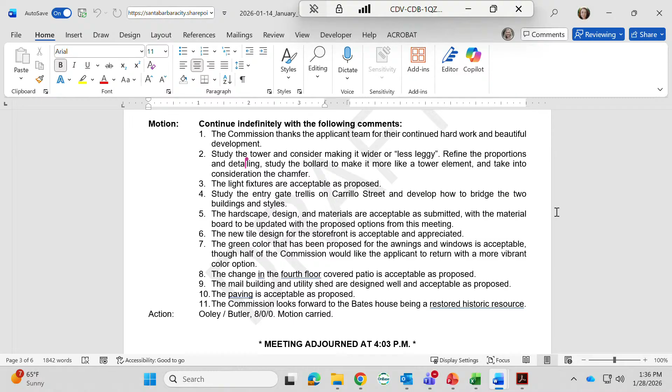Number 2, less leggy isn't clear. Well, we use the word bollard, but I don't think bollard is the right word architecturally speaking. A bollard is a thing that stops, but these were more abutments or buttresses or something. I think what we're referring to is the tire wheel stops at garages in the 1920s, and I think that was the bollard reference we were trying to describe. They were using that as a design element in a tower, and it felt weird that they were using that bollard-like element in a tower, which sort of didn't belong.

I think it was very clear to them what we were talking about, and if you listen to the video, it'll be very clear. I just thought for Historic Landmarks Commission we should use the correct terminology architecturally speaking, but I don't know exactly what it is. I thought one of you might know. Let's leave it as is, I can't think of it, there may be another term for specifically that element, but at least for them it was clear enough, they knew what we were talking about. Unless we think of something better for it. I did a little look and couldn't find the exact thing.

Okay, and then finally on number 11, just very minor, we were also looking forward to the colors of the Bates House in the next round. Number 11, the Bates House being a restored resource and the colors. They didn't have the colors yet, but they were going to bring them next time.

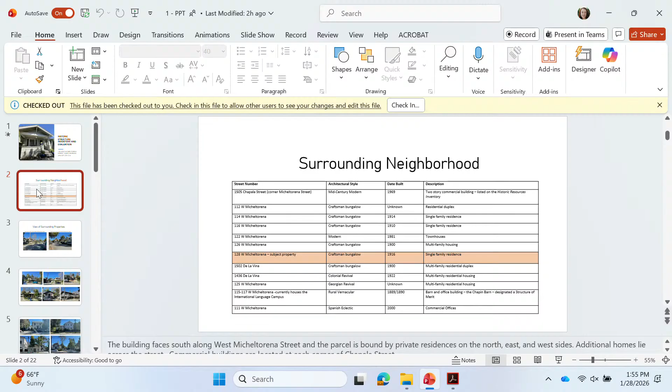The building faces south along West Micheltorena Street, and the parcel is bound by private residences on the north, east, and west sides. Additional homes lie across the street. Commercial buildings are located at each corner of Chapala Street.

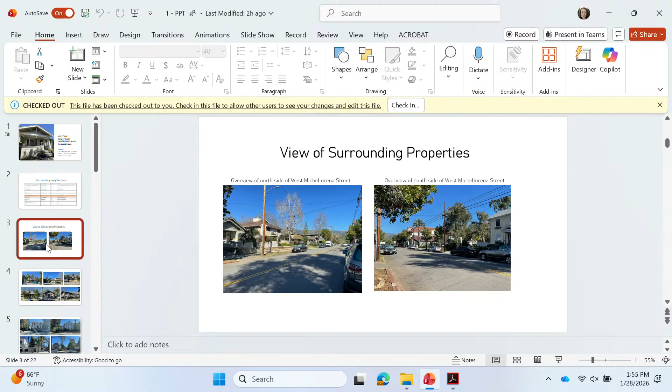This is a view of surrounding properties along Micheltorena Street. Here's a view of buildings on the north side of the block, starting with 1502 De La Vina Street, a large multi-residential building. It does have craftsman details, such as the knee braces.

Then we have 126 and 122 West Micheltorena, another bungalow and a multi-residential unit to the east of it. Then we have 116 West Micheltorena Street.

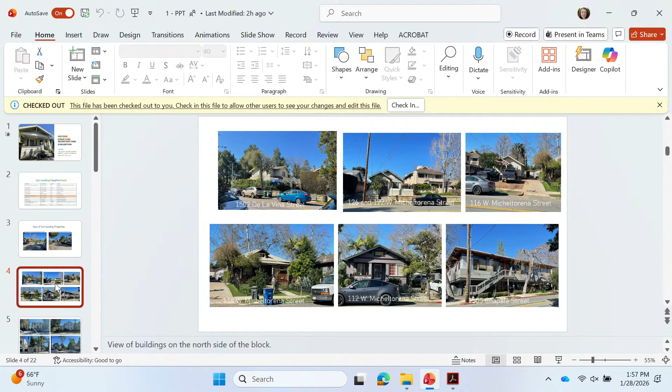Which is a very modest residence. Then 114 Micheltorena Street, that's a vernacular building. Then 112 West Micheltorena Street, that's modified. It does have craftsman knee braces along the roof line, but nothing more than that. Then 1505 Chapala Street is a commercial building.

Here's a view of the buildings on the south side of the block, including a colonial revival and a Georgian revival residence at 125 West Micheltorena Street and 1436 De La Vina Street. Then we have the Chapin Barn and office building. The office building has been restored. And then there's a Spanish-style revival building at the corner.

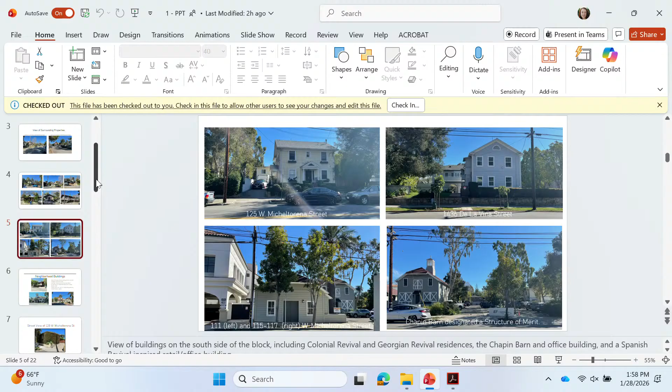The Danica House office building, built in 1969 at 1505 Chapala Street, is indicated on your left. Then the Spanish-influenced commercial building at 111 West Micheltorena is below on the left. And then we have the Chapin Barn and office building. The Chapin Barn, although it's been renovated, is listed as a structure of merit.

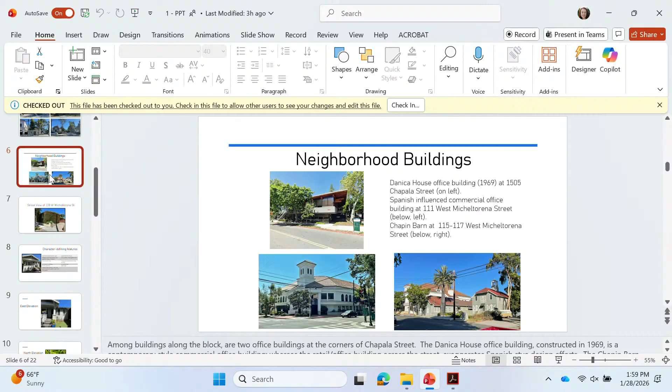Here's a street view of 128 West Micheltorena. A tall hedge frames the front of the residence, mostly obscuring it from the street. Behind the hedge is a small grassy lawn with landscaping next to the house. The hedge offers protection for the occupants' children. Edging the sidewalk below is a hand-chiseled sandstone wall.

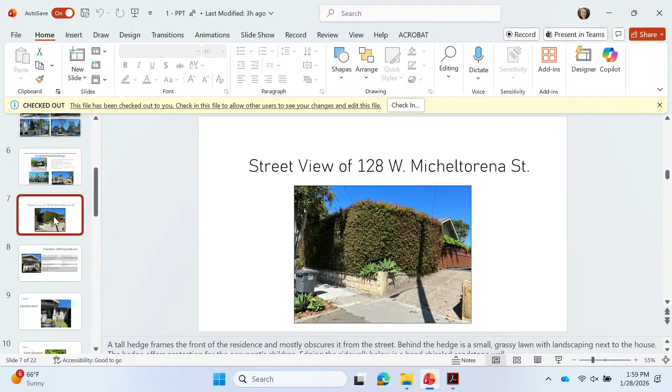The subject property is a craftsman-style residence, generally characterized by its wide eave overhang, triangular knee braces, and partial width front porch with corner columns. The one-story residence exhibits a raised floor foundation, wood shingle siding on the exterior walls, which are replacements, with wood skirting below, not original, and a low-pitched front gabled roof clad with composition shingles that are not original. This house form was prevalent in the early 20th century, especially in Southern California, between 1905 and the early 1920s.

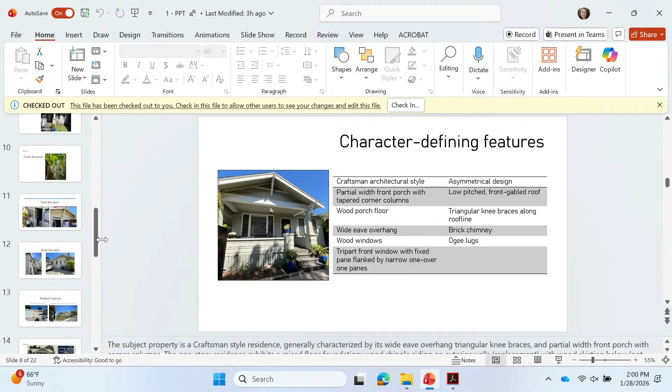I'm so sorry, I'm going to sneak in here. City TV has asked that it be full screen so it's more visible to the public, sorry. But you can move through the slides with this button right here. Okay.

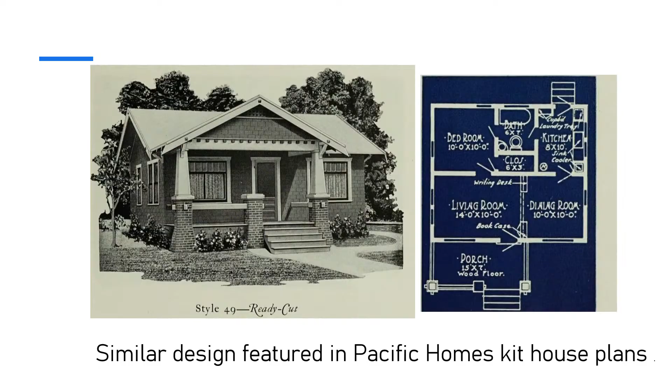Building modifications. There weren't a lot that were indicated over time, but the property records database contains permits, with the earliest permit for the subject property in 1944, and the most recent permit filed in 2004.

The most substantial known alterations occurred in 1944, when the property owners likely put a wood door on the new cellar, and skirting was placed along the base of the house. Other modifications at that time include a rear porch, toilet, bath, and window, which may be when the footprint was extended on the west and south elevations.

Mr. Peugeot replaced some of the doors and windows in 1984, and installed replacement roofing in 1993.

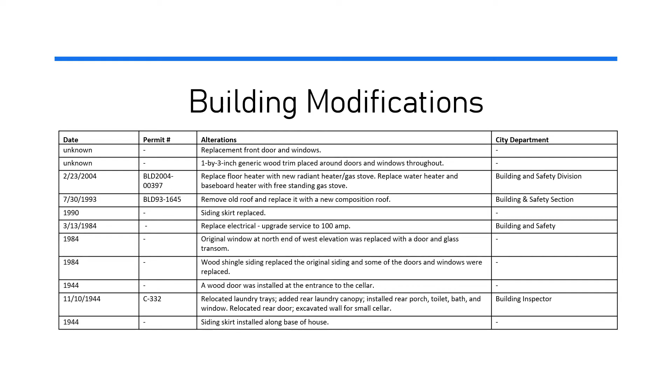Pardon my interruption to the chair, just to make you aware the applicant presentation has gone over by about two minutes. Okay, well, how are you doing? Can you wrap up in the next couple minutes? Yes. Okay. Yeah, we've read the report. Okay, you can kind of skim through quickly, just touch on them.

Events in association with the subject property: there are no specific events. The architect is unknown, but the building contractor was Alfred J. Avery. Alex Peugeot is the only prior resident with any local distinction, and he's here.

Okay, well, we all know the significance criteria. Under criterion 1A, although the property bears some association with the early 20th century, which was an important period of development, it does not have a direct association with specific events.

Criteria 2B: the subject property bears some association with the lives of persons important in local history. Most of the early owners were blue-collar workers. The design of the residence did not rise to a level of national or state importance. Under criterion 3C, the property embodies some characteristics of craftsman bungalows, but the quality of the materials and design were not exceptional according to the building permit.

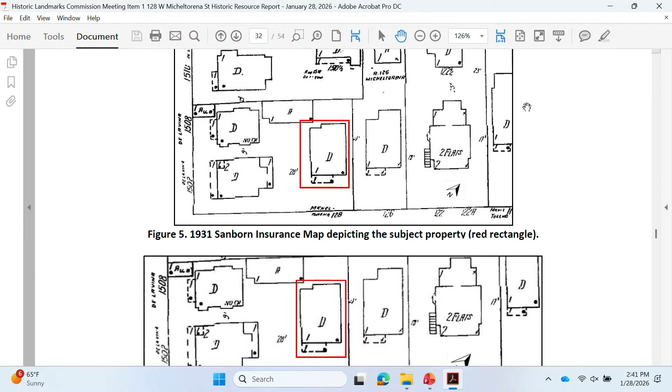We're not going to engage in a debate here, but what I do see is no driveway access for the two that are on De La Vina Street, and all the access for parking or for the interior to the properties is that one off Micheltorena, with a common garage for all of them. Two of them—the one in the back doesn't have a garage, the one in the corner doesn't have a garage, it's shared by two. We're not going to debate this, but I say that is one defect in the report, that you have not addressed the bigger picture of those three buildings and how they worked together and were designed and built together.

Okay, Commissioner Ensberg. That's bringing up a question for me.

Since this garage is connected but belongs to two separate properties, is that right? It belongs to two separate properties, but it's connected—we saw the picture of it. How does that affect everything? Are we saying we can demolish the garage but only half of it, or how does that work?

Probably—that's what's on the property. You just sawzall it and take it away? We'll let them figure that out. Okay, that was my question about it, okay.

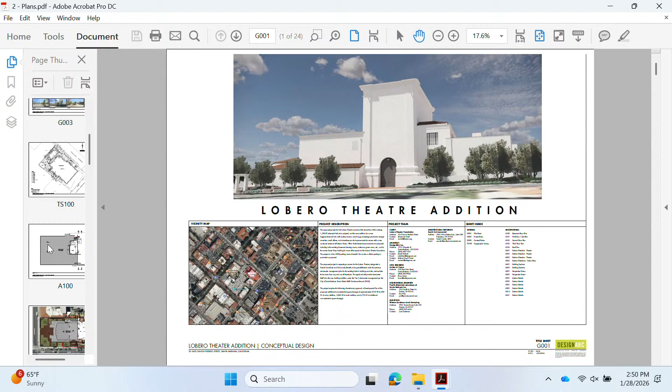Thank you, Mr. Grumbine. A quick summary, and I'll also have a little bit of time left for the executive director to chime in at the very end and close our presentation.

Since we've seen you about a year and a half ago, we've done a lot of work and due diligence. We were in front of City Council to get our community benefit designation for the landmark, which we didn't have prior to. We've also done our PRT application with staff and been working diligently with them.

Since then, the board has also started pre-construction services with a general contractor to navigate some of the value engineering we've been working on. Other due diligence items like getting our civil engineer, geotech, archaeologist, and historian on board, working on the PRT comments.

Since we've last seen you, we've also had the opportunity to get a budget on the project and study value engineering solutions, because it was a little bit more than we had anticipated. I'll have Mark talk a little bit more about that.

We were very pleased about the initial warm response we received from you all when we were here, and that gave us the vote of confidence that we were moving in the right direction in the first place. We're really pleased to be here finally in front of you so we can show you the revisions we've done. I'll turn it over to Sarah.

Hi everybody, pleasure as always. I've been working with the design team from the beginning for the first concept review and then through the feedback that we received from you all, helping them stay on track to conform to the standards but also incorporate the feedback and work within the El Pueblo Viejo District guidelines. I also coordinated with Nicole prior to her leaving to make sure we were on the same page, that the design was moving forward as we all thought it should, and that we were cognizant of the feedback we received.

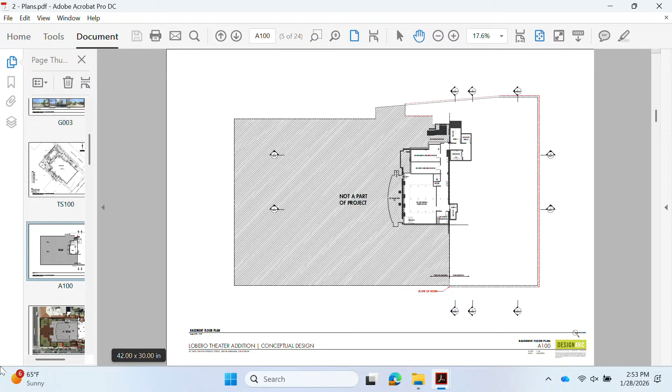Summarize the big changes. We removed the basement and made the first level the backstage area and lobby, which is about 4,700 square feet. We reduced the easterly footprint as well, pulled it back to align with the facade of the building, removed the second level balconies.

Removed the added third level at the scene shop, which was a request by the board, enhanced and studied the Paseo, which we love, relocated the new entry, the new main entry to the addition to the west. That was another suggestion by the board.

We had it on the east side on Anacapa, and now that's really back of house and loading and unloading. Expanded the easterly loading dock area, which I just mentioned. The setbacks now, which are, I think, really fantastic.

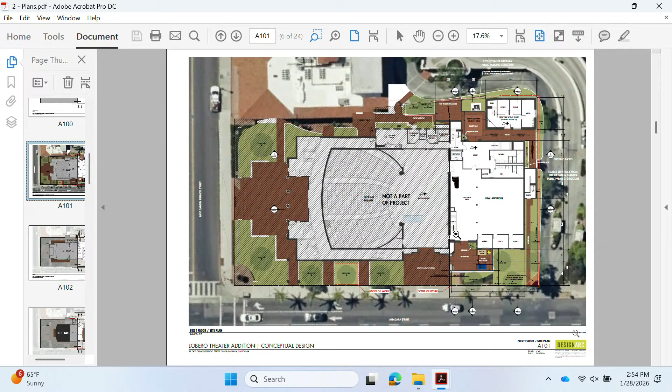I love it when a building is set back quite a ways from the street. Our previous plan had it out quite a ways towards Anacapa Street, and now we've made it flush with the building, which gets our land back in that area, which is beautiful for continuing the landscape up the street. That setback's about 27 feet.

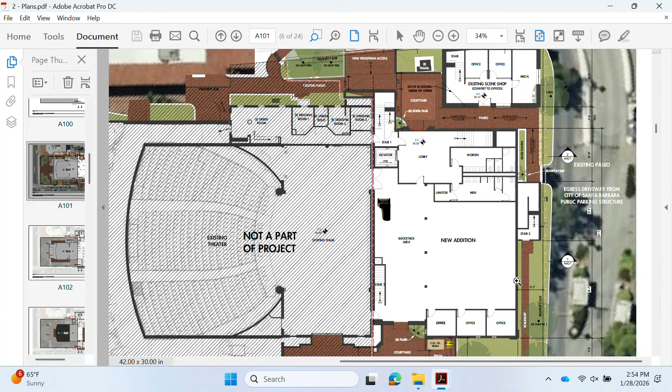The site wall intrudes into that, but that's obscuring our trash enclosure and back-of-house loading area and courtyard, which was suggested by the board. So we're very proud of that setback, and I think it's going to help really set the building off. We also lost a balcony on the north side, which was on the property line, so now we have a 10-foot setback from the city parking ramp on the north side, which is also great for landscaping. Let's go to, we're on 102.

The second level now is the banquet hall. The first floor was back of house. We lost the basement. The second floor now is the banquet hall, seats about 120 to 130 persons, includes a service bar, catering kitchen, bathrooms, and circulation.

The notch in the easterly wall line demarcates and separates the new addition from the original tower edifice, which I think is important. We propose offices within the second level and the scene shop, and we are not adding a third level to the scene shop, which is a request by the board.

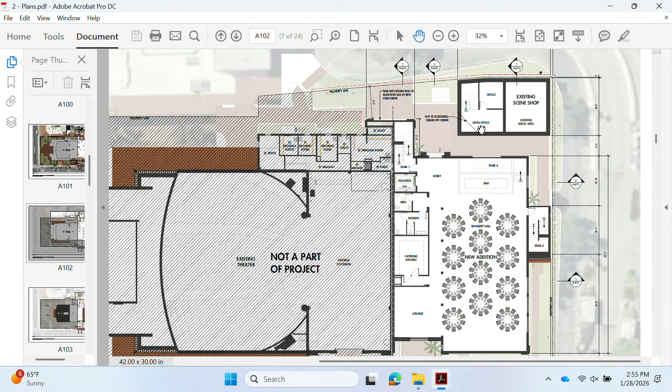A103, Melissa? Which one are we on right now? Where are the numbers? This is A103. This 103, okay.

The third level hosts a lounge and bar and event terrace with fireplace, which is much smaller than our original scheme, and I think more appropriate to the size of the project. The open-air terrace, which has amazing views to the mountains and to the east, is about 2,000 square feet.

The bar and terrace share beautiful views towards the courthouse and the mountains to the north, and to Montecito Peak and the Riviera to the east, which is really going to be fabulous. This open-air terrace is an ideal event space for the Lobero.

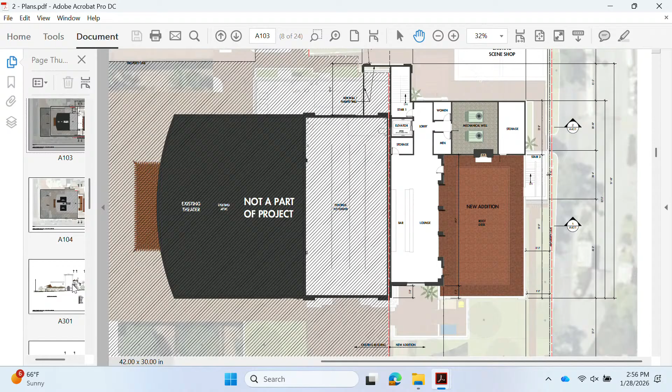Okay, now 301. I think this is 301. Yes, this is 301.

Architecturally, our historic mantra is complementary but deferential, respectful. We understand the importance of the magnificent Lobero design by George Washington Smith and Lutah Maria Riggs, and we hope that you approve of our ideas for the addition.

With the new addition, massing maintains the strength of the theater massing, but diminutive in relative scale as it cascades down to the north side of the project. Our view windows have a rational shape and no longer compete with a massive arched stage door. So that's another request from the board.

We adjusted that tall window, which is really going to be fantastic in terms of the interior space and the view. It used to be arched; we squared it off, simplified it, and made it narrower.

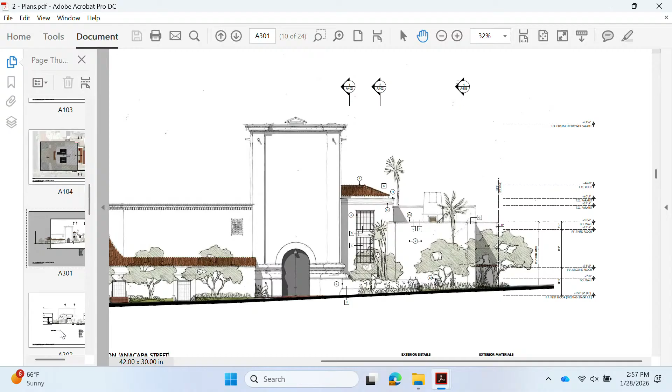We're also adding new olive trees along Anacapa, which complements the existing olive trees, and the olives wrap around the corner. We may be able to save the existing pepper tree, which is kind of iconic, which I drew in elevation there. We have yet to study that, but setting the building back the 27 feet really helps the potential life of that old tree.

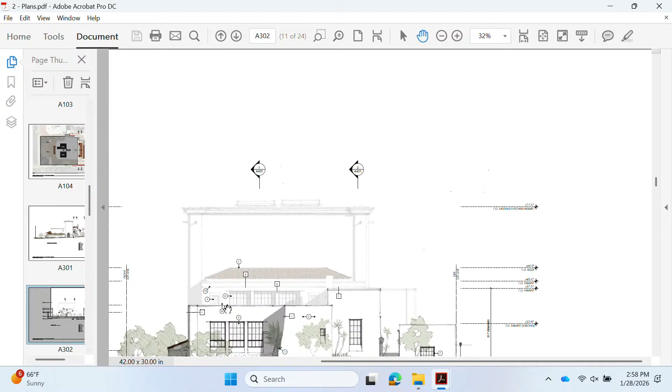To specifically address your comments from our first meeting, the building height is the direct result of the appropriate ceiling heights at each level, combined with floor structure. Our vertical massing reflects the iconic strength of the theater massing, but remains deferential to the scale and extreme height of the fly tower.

Massing steps down to the northwest Paseo entrance. You asked us to study the roof, cornice, and arched window.

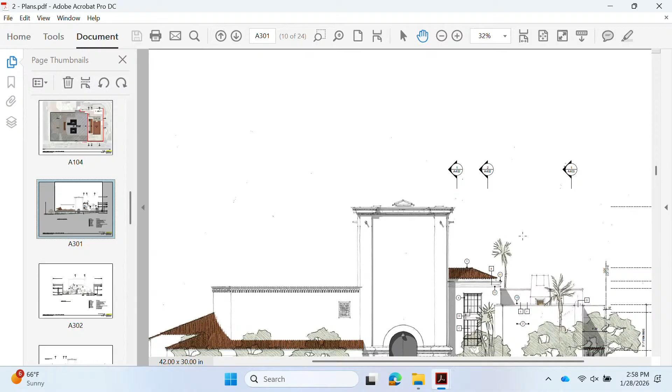The minimal mission tile hipped roof on top of our project relates to the neighboring building context. The Julia, U.S. Bank, El Centro, even Madame Rosinka's, finishes the project with a tile roof, as they are all capped with tile roofs. It's very Santa Barbaran and also hides necessary venting and some of our mechanical equipment.

We feel it finishes the addition and does not resemble or compete with the Fly Tower's iconic grand cornices. In a subtle way, this tile roof blends the northern addition with the original structure, as it finished also with a tile roof as well.

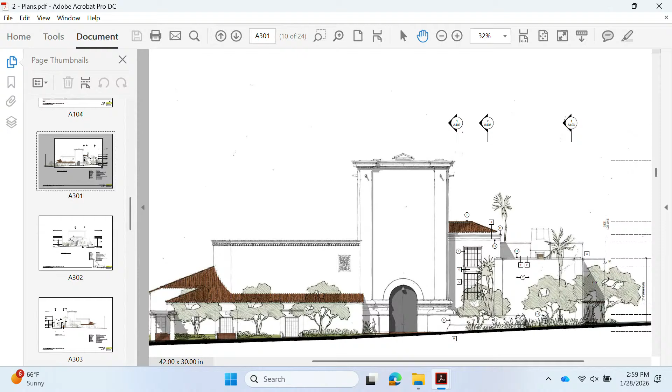The large arched window: listening to the Commission's comments, we have simplified the view window by losing the arched top and narrowing it slightly, which I've already mentioned. Okay, A302.

Okay, this is the north elevation. On this north elevation, our deferential modest massing steps down to the northwest to meet the paseo and the existing scene shop. You can see that on the lower right-hand side.

The bar lounge is symmetrical across the fly tower and still leaves 3 stories of the tower wall above, which is so iconic. I thought about this a lot when you drive down Anacapa, that our upper 3rd story is symmetrical about the fly tower. I think it feels better.

Note the northern metal-clad wood view windows from the banquet hall and lounge bar. These windows are really going to be fantastic. They're large and they face north, which views the courthouse and the mountains. Our idea is that they're wood-clad windows that are metal-clad.

The olive trees wrap the corner, and here we propose a privet hedge, a giant bird of paradise, bougainvillea, and kentia palms located at the paseo entrance. So we're enhancing the paseo entrance as you walk towards our project from the U.S. Bank.

I want to speak to some of the other HLC comments. The 3rd floor annex building removed. We had a 3rd floor suggested there, which provided more offices, but we decided, we took your advice and decided not to enlarge that, and it was complicated anyway.

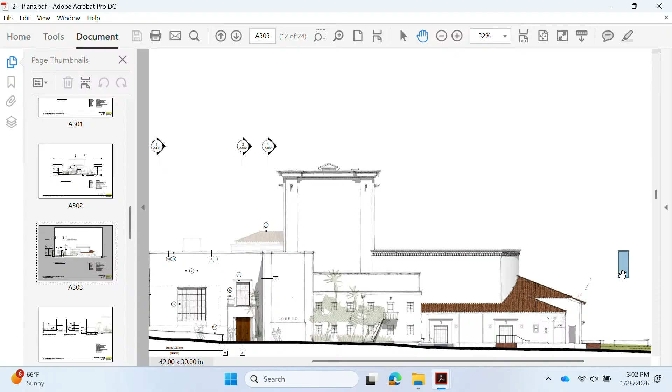Moving along to A303. This is the west entrance of the Lobero, which is just off city parking lot number 9. This is a request by everybody, the board and yourselves, to move this entrance to the west. We had it on the east side. It makes a lot of sense because most people use that parking lot to come visit the Lobero. So we studied that, and we think this is an appropriate change.

It's clearly visible as you leave city parking lot number 9. The scene shop is dashed in the foreground, but it remains a strong element to this entry and actually helps create a nice square courtyard at the front door. The exterior massing to the right of the entry is subservient to the tower and provides an appropriate space for entry signage. The new large entry door is flanked by a decorative facade which melts into the 2nd floor lobby window above, and the paseo ascends up to the left.

A lot of work to get the paseo elevations and ramp to line up with our floor levels. There's some more details we'd like to talk about in the future. But we have that paseo ramp ADA accessible, and we're excited about the paseo. I think it's neat to connect up with the Santa Barbara paseos, and I think this one will be interesting.

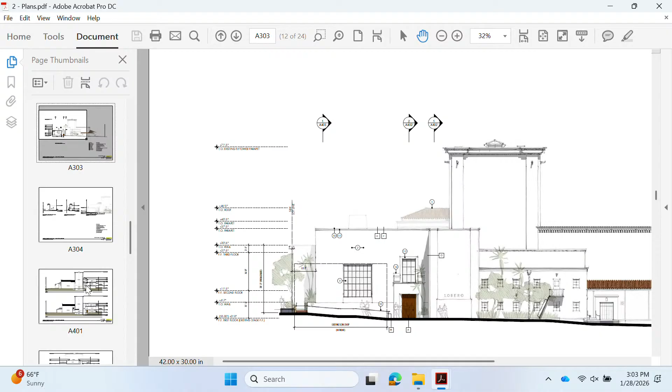We eliminated the trellis. We had a trellis proposed that went down the paseo from the north to the south, and we eliminated that as part of our VE efforts with Staples Construction.

2 minutes left. We have 2 minutes left. Oh, God.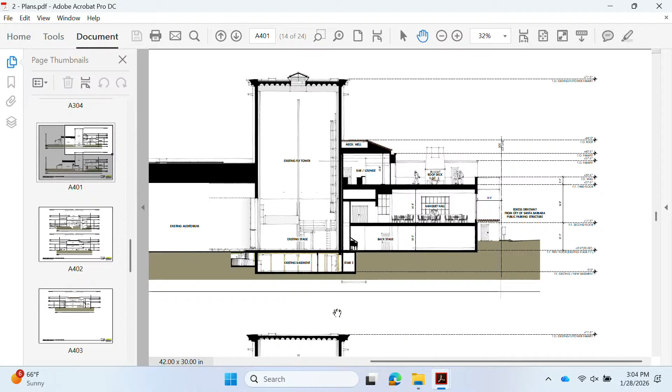Let's go to A401. There's just a lot to cover. Okay, this is an important section.

This really tells the story, but the backstage area was an important change for us because it really needed more space and more room for the actors and performers, and there's 3 offices down there as well, and it was necessary to keep it level with the existing stage, which is really a nice touch, and that inspired us to put the banquet hall on the 2nd level. The lower backstage ceiling is about 10 feet, the banquet hall is about 14, the roof terrace above you can see, and then the bar lounge ceiling is about 13 feet. You can also see our proposed mechanical well above the bar lounge area.

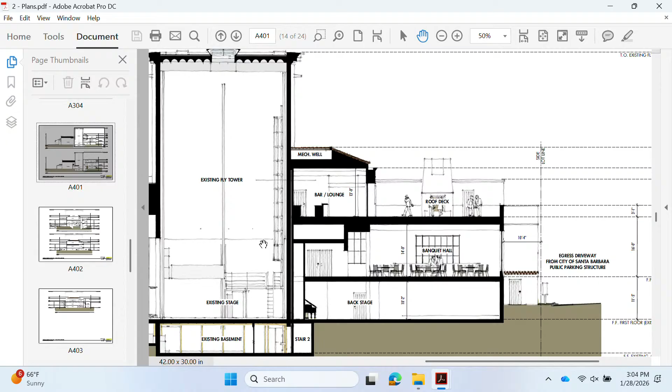Let's skip A402. Let's see, this looks like what we should be. This is A501? Okay.

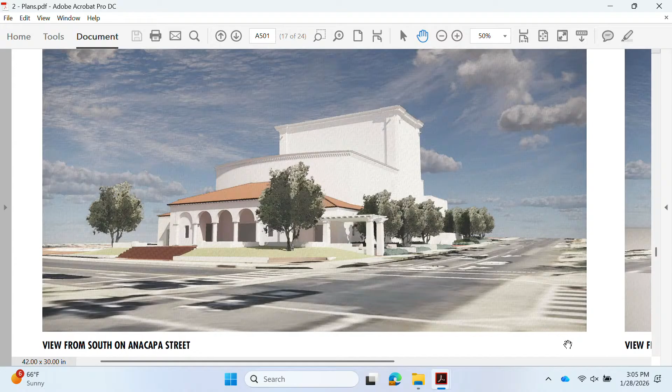This view from the south of Anacapa Street and East Cañon Perdido Street is really, in our minds, the iconic view of the Lobero Theater, the front door. We've worked hard to make our addition kind of very diminutive to this elevation, and it helped a lot by pulling it back and keeping that second-story portion as low as we could.

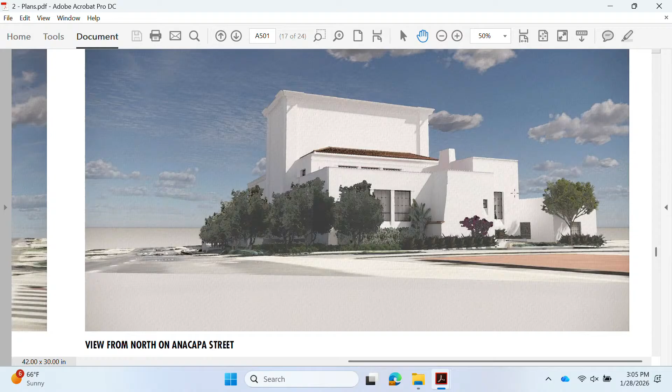This is looking at it from the north, coming down Anacapa Street, and you can see the symmetry of the hip roof above against the fly tower, and how our massing steps down or cascades down towards the north, eventually encapsulating a recessed opening which is more of a welcoming gesture for the Paseo.

Go down to the eastern view. That one, okay.

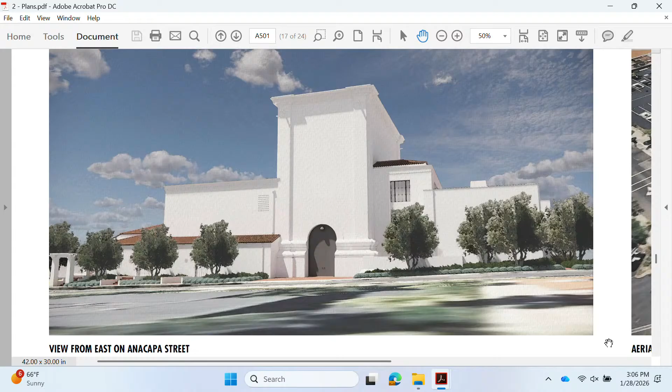Here we can absolutely see how we're stepping up towards the fly tower with our vertical massing. We intentionally have a very blank wall here. We have enough window space to the north, and we like the blankness of this wall and feel that it helps relate to the strength of the original Lobero design. So we didn't see putting a lot of windows on this elevation because we love the massing and simplicity of what George Washington Smith and Lutah Riggs had started with.

The aerial view is sort of self-explanatory: the terrace deck, the hip roof with a mechanical well. You can really see here our service loading area off of Anacapa Street, and that's really back of house. Our trash is behind a 7-foot wall. We're suggesting to march more olive trees up Anacapa Street, and we have room to wrap that olive idea around the corner, which I think is a nice touch. Certainly the corner will be well landscaped.

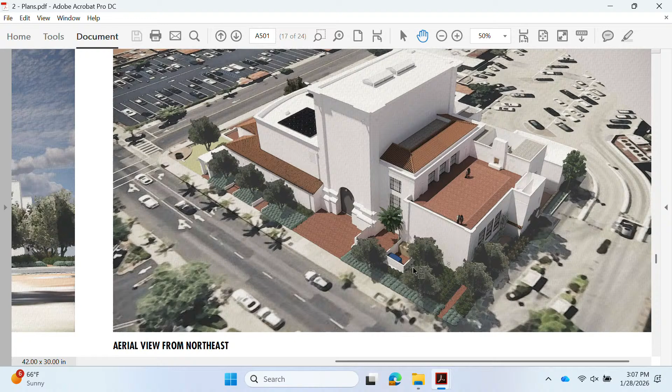The next page is, sorry, I skipped one. Okay, here we go. Let's go to the top. The north elevation, blow that up if you can, Melissa.

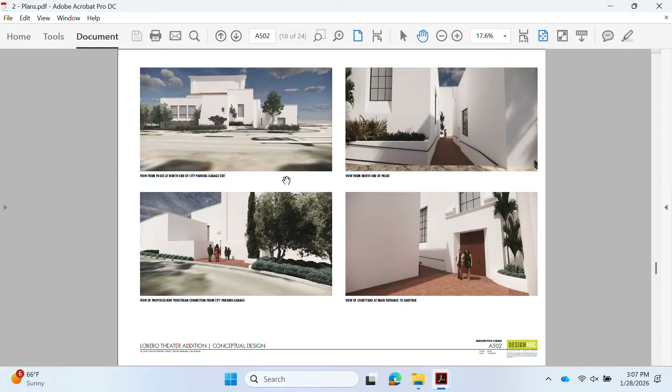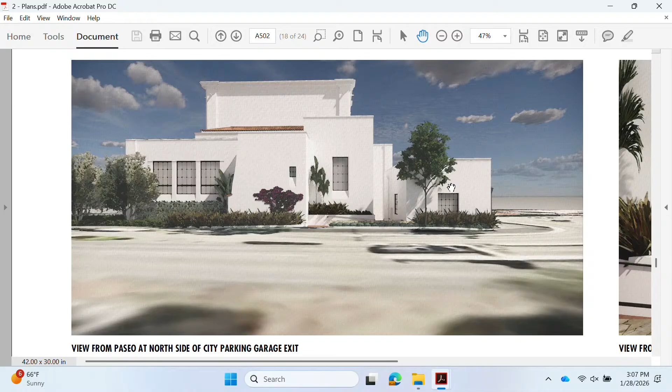Again, this is really about the cascading of our massing down towards the north and towards the U.S. Bank. There's a scene shop on your right, and this is really our welcoming entrance to the Paseo, which leads one across the entrance to the parking lot, all the way down around our building and ends up at the front door in the courtyard we've created.

This entry will be enhanced by further landscaping, Kentia palms in the corner, cycads, and we have a large giant bird of paradise to the left of the stair tower right there.

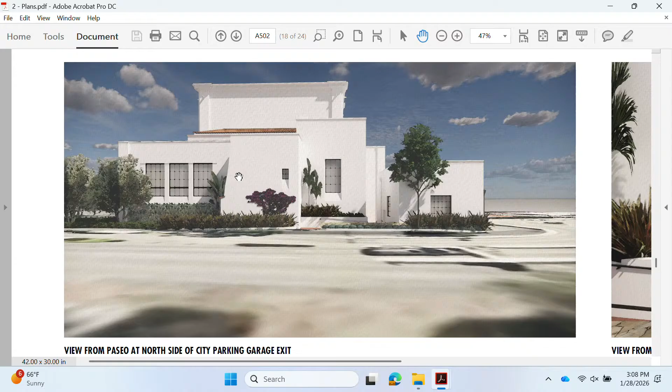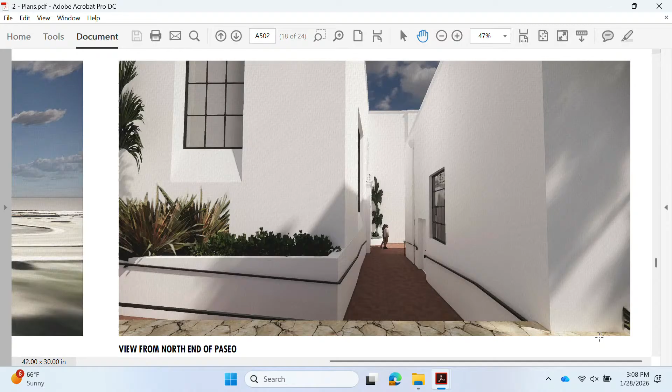Okay, next, go to the right. Close-up view of the, once you approach the Paseo, we kind of circumnavigate around the stone wall in the foreground because we need the excess length for our ADA access. So I think it's a very welcoming entry, and I hope Cass appreciates our efforts towards the Paseo.

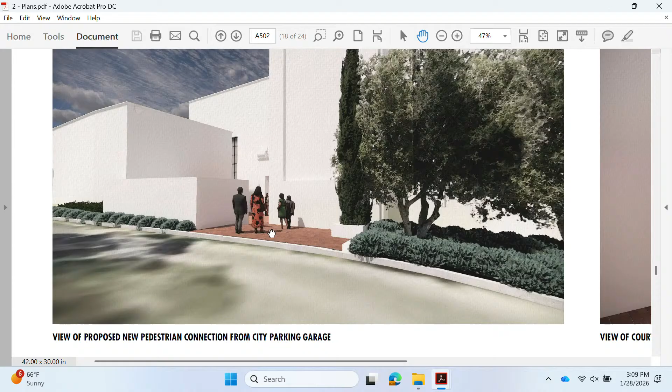Sure, there's more fine-tuning to be done. This is a great shot too because we're opening up. There's landscaping here, but as you come down from City Parking Lot number 9, you cross the entry road, and we're opening this up so that our entry court is more visible. By adding a site wall around the transformer, once you're in the entry court, I think you'll feel a nice sense of place, and it makes itself an entry and a place to be.

You can see that we're working on a facade there at the entry door. It's furred out and it will have some decorative elements to it and captures a second floor window, which is in the elevator lobby on the second floor.

And looking up that ramp, you'll see another large window, which you can see in elevation from our former elevations. That's a large window kind of halfway up. So as you enter the building, you're going up a light-filled stairway to the second floor banquet hall. So an important feature to bring more light.

That's the idea with our larger windows, even though we don't have a lot of windows on the eastern elevation on Anacapa Street. We do like the idea of our large windows because we think it's just going to really enhance the view and make it a nice, exciting, light-filled space.

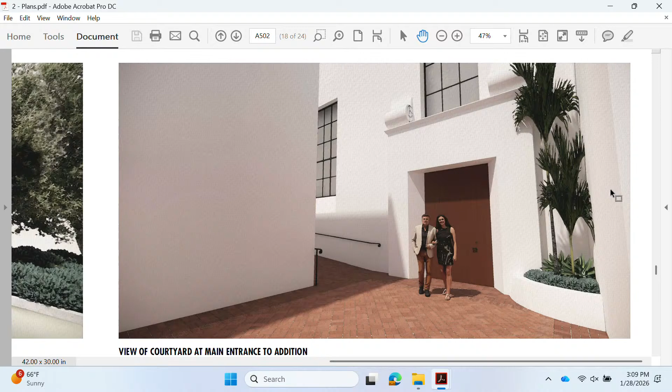Moving right along, got one more thing to talk about. A701. Okay, here's some sketchy details that we've done. So I know you guys love details, and we're into them as well.

Essentially, the existing building's cornices are very well defined, almost neoclassical and sharp. We're suggesting our cornices of various sizes relate to the massing, but also that they're softer. That's one way we plan to differentiate the architecture from the existing building.

We've looked at the roof section, down on your lower right, and we'd like to recess the roof with an internal gutter. I think it minimizes the roof and sets it off against the style of the eave detailing on the main theater as well.

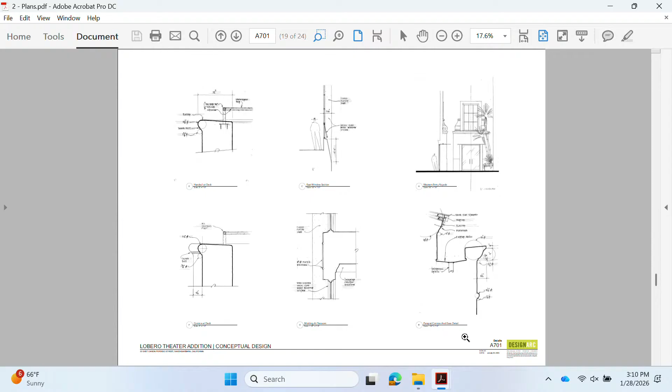Next page, some more sketchy details we would refine later, but of course paying attention to the beautiful handrail on the paseo with wrought iron detailing. To the right are our columns that flank the entrance to the bar lounge, and they will have some chamfers and simple detailing as well.

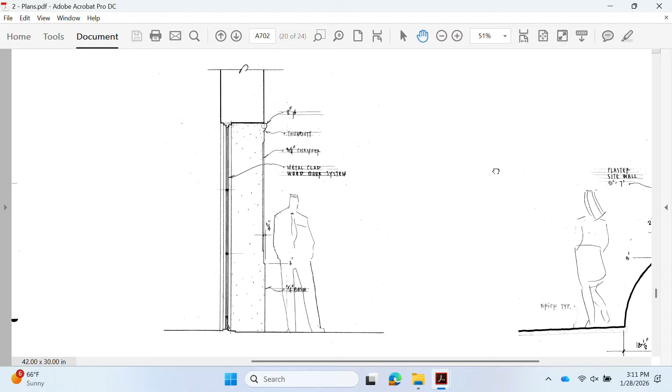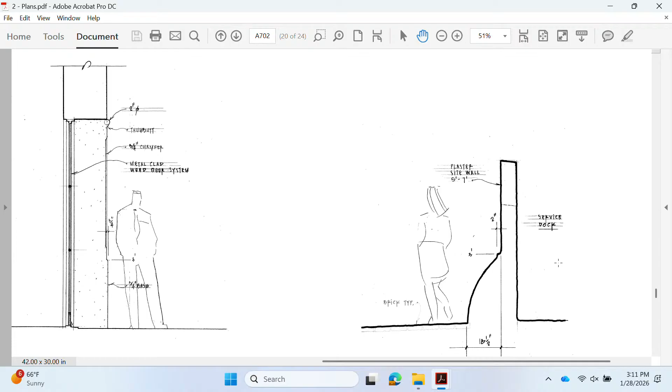This bump is kind of cool, I think, because it's down by the loading dock. When you study the building and look at just adding a normal site wall to the east side where we have our loading dock, it didn't relate well to the older building, so we added a furred out base like this, exaggerated, as is the giant base of the existing Lobero entry on this side. So we're trying to say we get it, but we like the language and we're inventing our own version of it. I think that concludes my presentation.

I'd like to say that we feel our proposed addition has a certain elegant simplicity, complementary yet differential to the existing theater. The simple massing reflects the iconic strength of the historic Lobero, boldly conceived by George Washington Smith and Lutah Maria Riggs. We look forward to your thoughtful input.

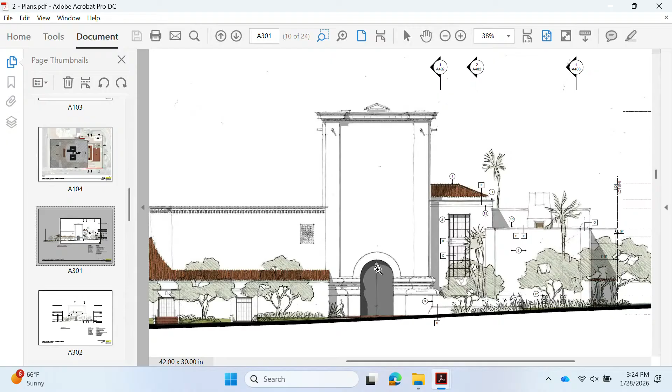And then I agree with Mayor Lodge, particularly back on that Anacapa Street elevation. If you can go back there to that Anacapa Street elevation, east elevation, and zoom in on that elevation a little more. I look at the two windows that are stacked there, and I wonder if the proportion of those windows to the wall is good, as if maybe more plaster, smaller windows. I agree with you that they're spectacular from the standpoint of what you have on the inside and the views towards the mountains or whatever, but I'm just wondering if the proportions that are there of the white wall to the windows is not uncomfortable. And I would appreciate suggestions or rebuttals from others. I'm sure you'll get them. That's my comment.

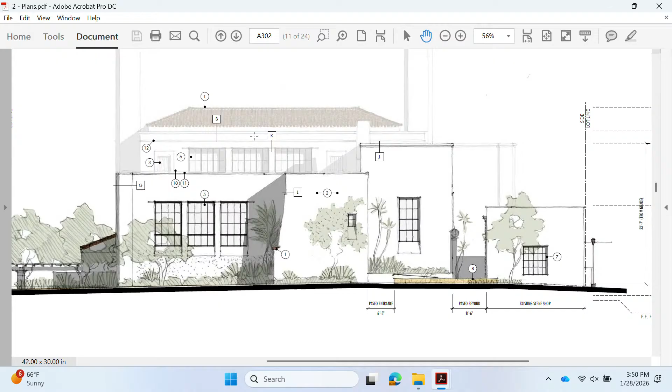And then the only other comment I wanted to add is, can you go to the back elevation? Just the thought of, as you're studying these proportions, the division between - if you can zoom into the triple windows - so the plaster between, which is like a pilaster almost that you've abbreviated with the simplified capital, maybe look at - they seem a little skinny. And maybe look at how the proportions, when you think about the rest of the building, you have some piers that were done later that are square, but then you have the round columns in the front that are arched. And I'm just curious as to the plaster to opening ratios, because it's such an almost massive building.

Column - yeah, and maybe it needs to beef up a little bit or something, but just to - the break in between, that plaster, it looks a little skinny compared to what I think the rest of the building is. The rest of the building is pretty massive. Yeah, and even the front columns, those Tuscan columns with the arches, they're pretty stocky too, solid. So just study that as you're looking at the windows, and these ones in particular, your plaster divisions.

Chair, Commissioner Ensmer, if I could just add on to that - do you agree, though, I mean, that they should still be simple, like we see here? Yeah, but maybe - just a little, it might be wider?

The proportions are a little off—wider, not more intricate. I appreciate this simplicity and how it differentiates from the main building. That's what I appreciate so much about it, but I do see what you're saying, that maybe it could be a little wider.

It's not as easy as just adding six inches to each side, because then you're pushing the windows, and it becomes a whole study—maybe you push the windows, or simplify them, or change the proportions. But I don't think the detail needs to increase to the level of the main building.

Not to be like a column with a capital or anything like that—just simple. I think you have composite columns in the interior and Tuscan on the exterior, so maybe this is just an Ionic thing, or chamfered corners, or simplified to something like that.